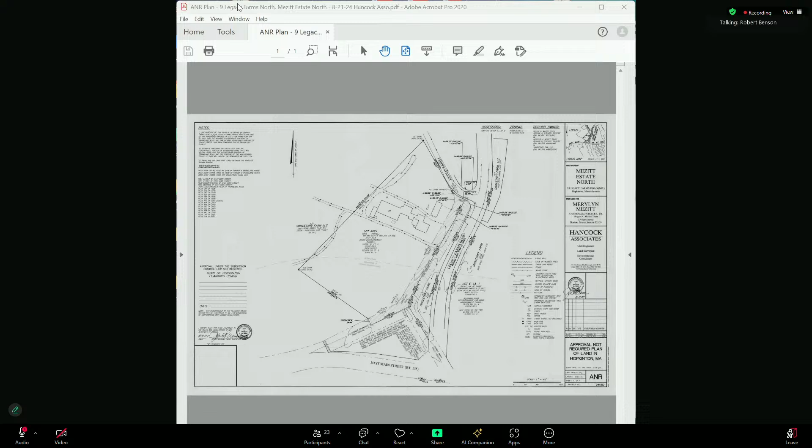So approve ANR Plan 9 Legacy Farms North, 67 East Main Street. Is the applicant on? Dan Bremser for the applicant. All right. Dan, if you'd like to give us an overview of what you're trying to do. Very good. My name is Dan Bremser. I'm a land surveyor with Hancock Associates in Marlboro. This plan is a little different compared to most that you see.

The 45-degree hatch that's closest to that original lot is the half of the road closest to that lot. What technically happens when a road is discontinued is the ownership of the road basically returns to the abutter from the center line of the road. And to make things a little more complicated, there are two record owners to that original lot, which is the Roger N. Mezitt Trust and then the Merylyn J. Mezitt Trust, which each owned 50%.

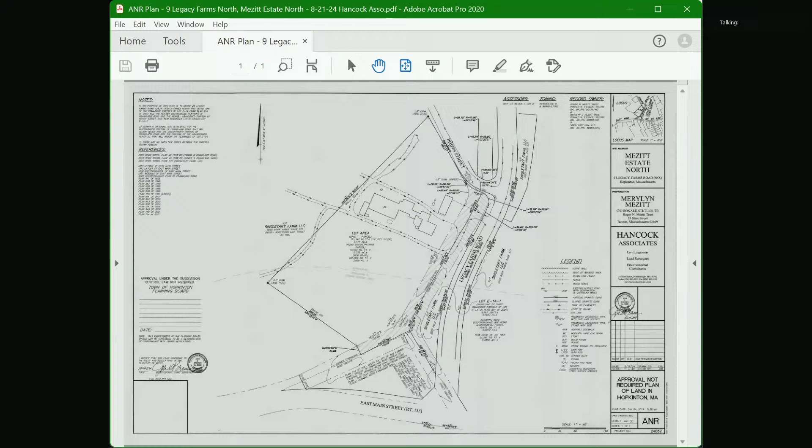So 24 Chestnut Street. Is the applicant on for 24 Chestnut Street?

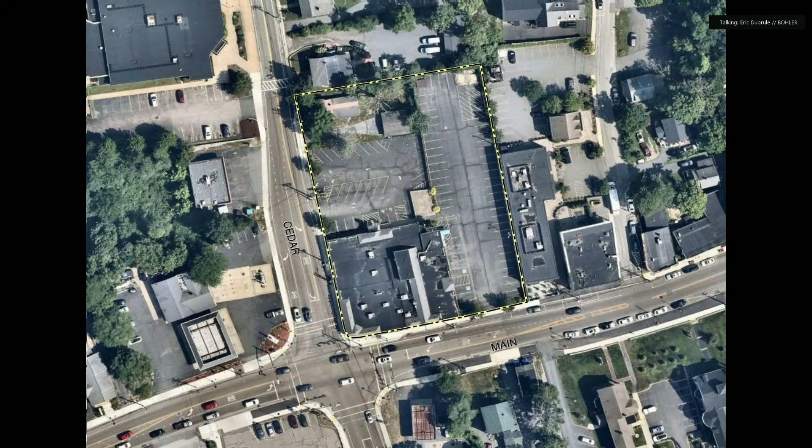The proposed project, we're essentially proposing to demolish the entirety of the site. And again, what we're proposing is a building that's a 3-story mixed-use building, comprised of about 6,800 square feet of retail and 60 residential units. Rich, if you're able to switch the slides. Perfect. So again, site access under the proposed condition, we're providing 2 driveway locations, 1 full access on Main Street, and that serves the parking for the retail as well as shared public spaces. At the very far end of that Main Street parking lot is access to the parking garage for residential parking.

We've also consolidated the driveways on Cedar Street and provide a full access driveway at the most northerly corner of the site, and that provides access to the residential parking at the lower parking garage. From a parking compliance standpoint, we're required 100 spaces where we're providing 122. And the thought process there is that that additional parking would be provided for shared public parking off of Main Street.

The existing site's very well served by existing sidewalk infrastructure from a pedestrian standpoint. So we're proposing accessible pathways not only to the front retail portions along Main Street, but also a path into the amenity spaces within the courtyard, which I think Matt will get into in a little bit more detail. Very high level on stormwater management and utilities. Under existing conditions, the existing site essentially just sheet flows either untreated into Cedar Street or is captured by a couple of catch basins and then again untreated and sent into the municipal stormwater system.

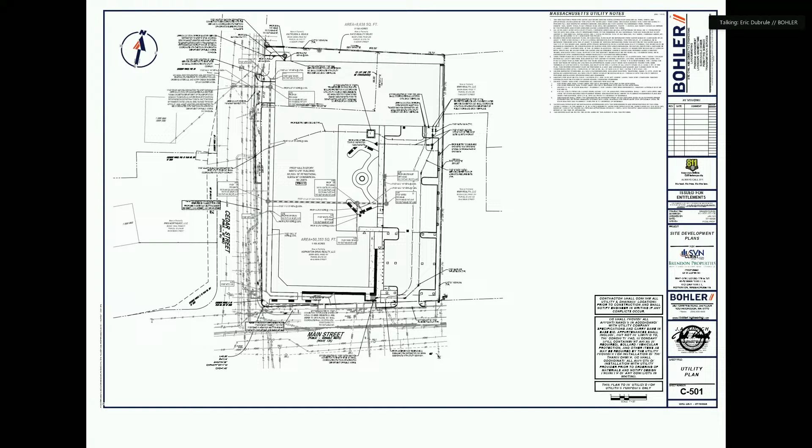Thanks, Eric. Good evening, Mr. Chairman and members of the board. For the record, Shaun Kelly with Chappell Engineering. I'd like to just give a brief overview of the traffic study that we conducted, and I'm sure we'll be going over it in more detail as the project advances.

Go up a slide. So again, as I'm sure you're aware, the project is located at the intersection of Main Street and Cedar Street, Route 135 and Route 85. They're both state numbered routes, but they're both under local jurisdiction, so there's no MassDOT involvement with the project. Our study area that we looked at for our assessment included the intersections that we felt would accommodate the majority of traffic. That's the intersection of Main Street with Cedar Street and Grove Street, the signalized intersection of West Main Street with Main Street and Wood Street, and then the 2 driveway intersections that would serve the project.

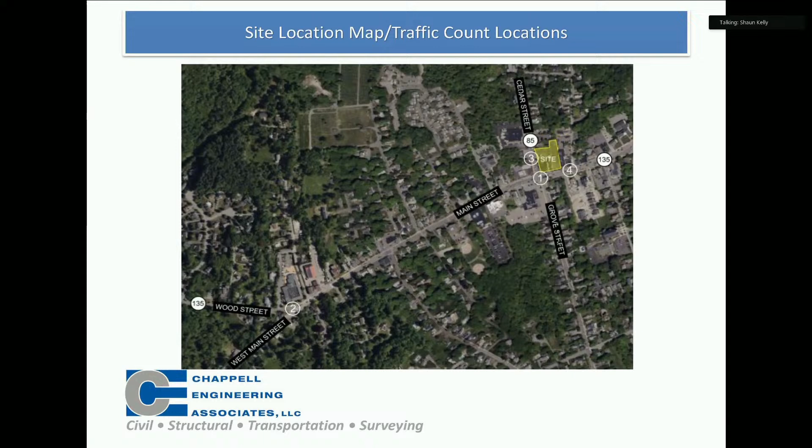We looked at traffic volumes. We looked at them on a daily basis. We looked at the weekday morning, the weekday evening, and the Saturday midday. And those are the time periods that we typically drill down on because it's the busiest time for both residential traffic as well as commercial traffic.

We looked at crash data, very low crash occurrences typically in the area, particularly at the driveways that exist today. At Main Street, we're looking at around 1 crash per year. And then on the Cedar Street driveway, it was a little bit higher, about 1.5. Looked at vehicle speeds, no issues with respect to sight lines.

With respect to the traffic itself, we rely on data that's published by what's known as the Institute of Transportation Engineers, or the ITE. And what the ITE does is it develops rates that tell us how much traffic a project will generate based on its size. And there are two components here. There's the residential component and then also the commercial component.

As you can see in the morning, evening, and Saturday, the residential component generates anywhere from about 30 to 45 vehicles per hour. That's ins and outs. The retail, pretty low generator in the morning, only 16 trips, and then about 40 on a Saturday and during the weekday evening. Now, some of those retail trips are pass-by in nature. They're already traveling along the corridor. So then that typically is 20 to 35%.

When you net all of that out, what it tells us is that this project during the busy peak hours is expected to generate about 41 new trips in the morning, about 60 in the weekday evening, then about 76 on a Saturday midday. So it's about a car a minute. Typically, it's about a car entering every other minute and a car exiting every other minute. Next slide.

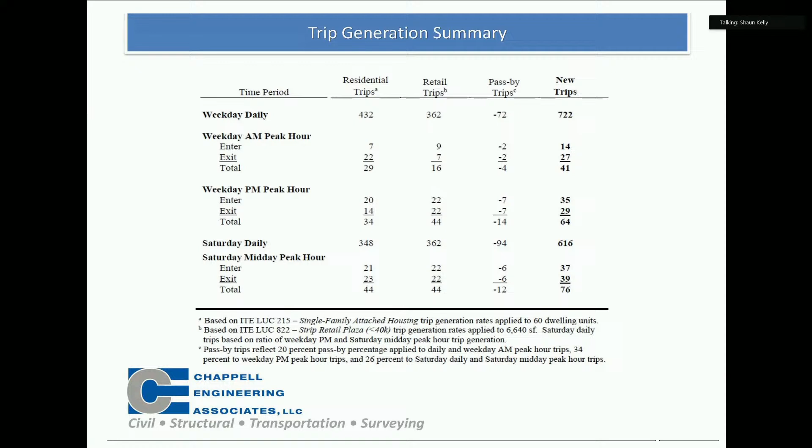I think one thing that's important to keep in mind here is that this isn't a virgin undeveloped site. It has historically housed a fairly large pharmacy. And what we did is, we ran the trip generation for the pharmacy that has been on the site historically, just to give an understanding as to how much additional traffic is expected based on what has historically occurred on site. And just not to overstate the trips, we actually applied a high 50% pass-by to the pharmacy trips. So these are half of what the ITE would say unadjusted.

And as you can see, on a weekday level, it's about 60 trips total over a 24-hour period. During the busy commuter hours, it's essentially a wash, 4 more trips in the morning, 1 more in the evening. On a Saturday, it actually does less traffic than a pharmacy would generate on a daily basis. And again, those peak hour volumes during that midday are still fairly consistent. So in comparison to what was typically out there when this project site was a pharmacy, it's not a whole lot of difference during the busy hours. Last slide.

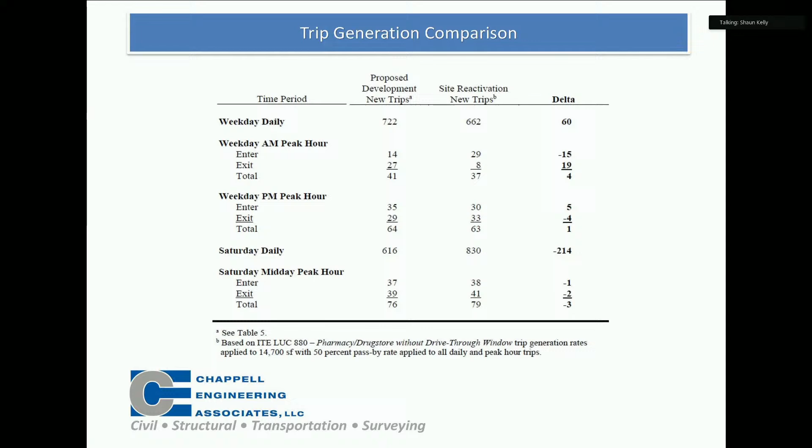So really, our recommendations are focused primarily on access. We're recommending that the 2 existing driveways on Cedar Street, the northern and southern driveways that feed into the existing parking lot, both be closed with sidewalk across them, and that the driveway would be relocated as far north as possible where the residential home is today. On Main Street, the driveway today is already as far east as possible. It's at the eastern property limit, which is where it wants to be. We're recommending it gets maintained in that location.

And then really the last recommendation is to bring the existing or proposed driveways into conformance with MUTCD design criteria, including painted center lines, stop signs, and painted stop bars, and ensuring that sight lines, again, are maintained in both directions. And that's really a high-level overview. I'll turn it over to Matt Merva now to go through some of the landscape architecture.

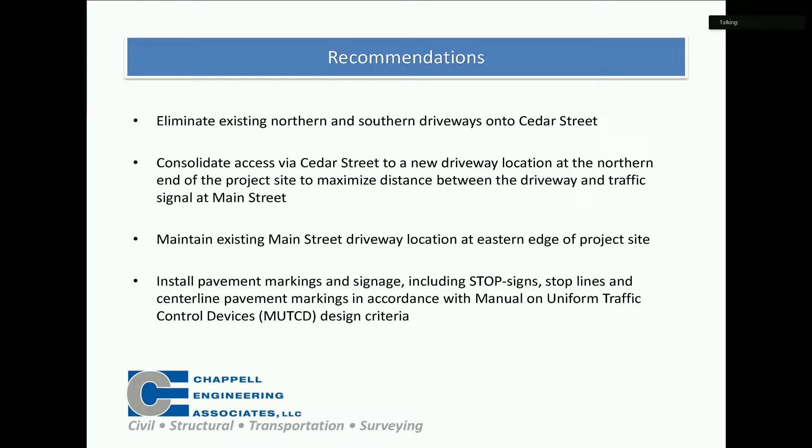Thank you, Sean. Again, Matt Mrva with Bohler Engineering, for the record, landscape architect for the project. I know we already saw this slide, but I'll just dive into a little more detail on how we're treating it from a landscape standpoint. One thing you'll notice is that our building in the proposed condition is pulled away from the corner a little bit from Main and Cedar, more than it was before.

But really trying to create some green along the back of the sidewalk here in the downtown, while still creating that urban corner that the architecture really provides for. And Rich will get more into that detail in a moment.

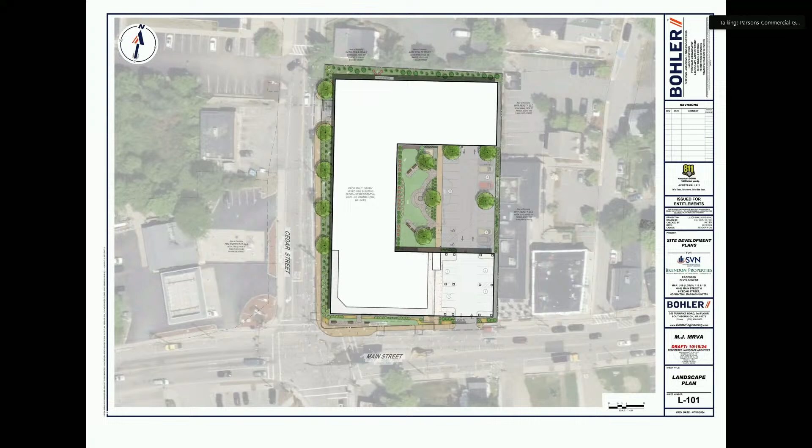Thank you, Matt. Members of the board, for the record, Richard Rankin Associates, providing the architectural service for the project. As was mentioned, our team worked hard over the last year to create a project that meets the requirements of the zoning bylaws and one that we hope will be a catalyst for future development within the town center. During that time, as has been discussed, we met with town engineering, the building inspector, Hopkinton Fire, the historical commission, and so on. And we've worked to pay homage to the architectural vernacular of this historic town of Hopkinton in an effort to create a mixed-use building that fits into this prominent corner within the town center. We'll get into a little bit more of some of that homage, if you will, in upcoming slides.

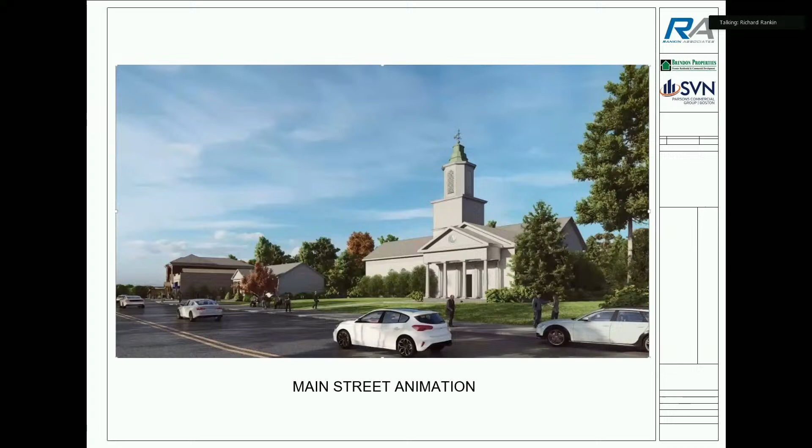We started to create an animation that traverses westward on Main Street, beginning at the town common and ending at the intersection of Main and Cedar Streets. This was done to show the context of the existing streetscape and relative proportions of the buildings within it. We start with a view of the Presbyterian Church. And let me just get this running for you.

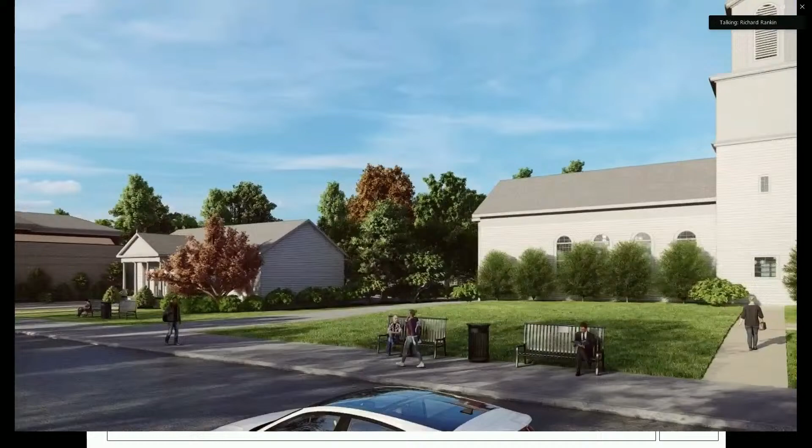Hopefully it's fairly smooth. We've had some issues with Zoom, but start off at the Presbyterian Church, past Masonic Lodge, Middlesex Bank, Bill's, the Town Hall, past some restaurant storefronts, barbershop, a two-story mixed-use building, and the Central Public House next door, and then our building that makes its way to the corner and around down Cedar Street.

As you can see, the height of the building, with our facade and cornice, is similar to that of the adjacent mixed-use building up the street. This is due to some assistance from the declining grade down Main Street, but hopefully it gives a flavor of what life is like without the drugstore and what it could look like. And the scale of the building relative to the existing buildings on the north side of Main Street.

We think it fits very well, and especially with the first floor retail component, which engages and activates the streetscape along with the transparency at the arched entranceway that allows interesting views into the courtyard area and breaks up the massing of that facade. Additionally, as has been discussed, we've got that wider setback at the street curb line, which was installed as part of the realignment work at the corner there, and it's been landscaped effectively.

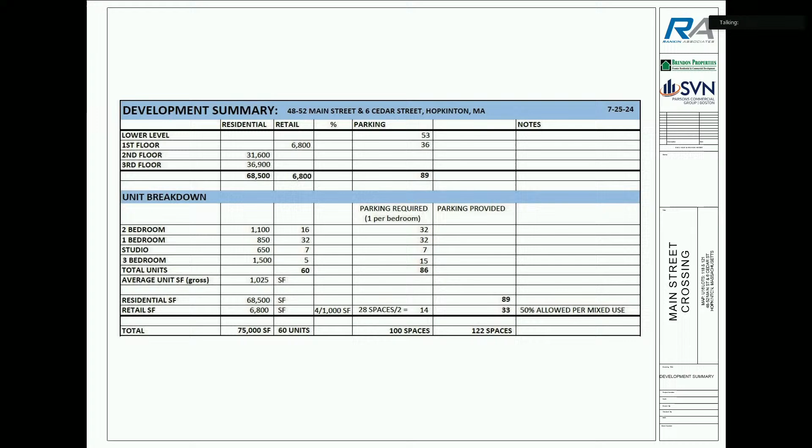Starting with the lower level, we have a controlled access off of Cedar Street, accessing 53 assigned residential spaces, including accessible spaces. We do have 2 circulation corridors which provide vertical connectivity to the upper floors. There's amenities, including bike storage for tenant use and maintenance and mechanical spaces for building operations. Additionally, we have areas allocated for the storage and removal of trash.

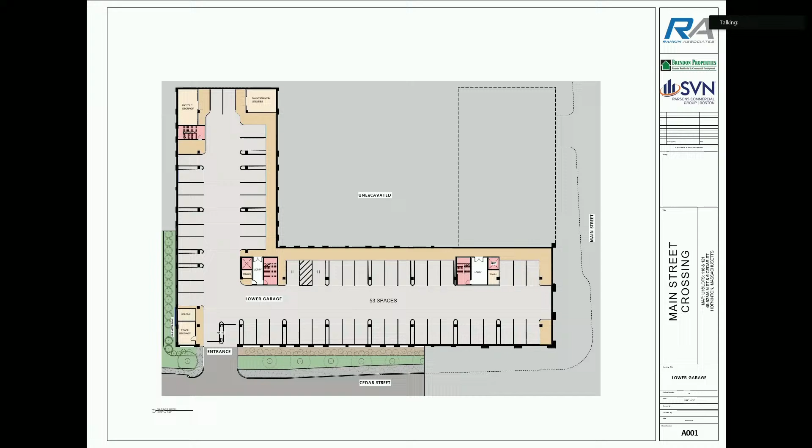On the first floor, we have retail spaces shown here in purple, violet. Our courtyard, the 33 spaces of public parking, including accessible spaces. This level also contains 36 residential parking spaces under cover. The plan indicates in yellow the covered walkways that allow public access to the retail space and also the main elevator core. Visible on this plan, as it has been discussed, is that generous landscape buffer with public space amenities between the existing curb and on both Main and Cedar Streets.

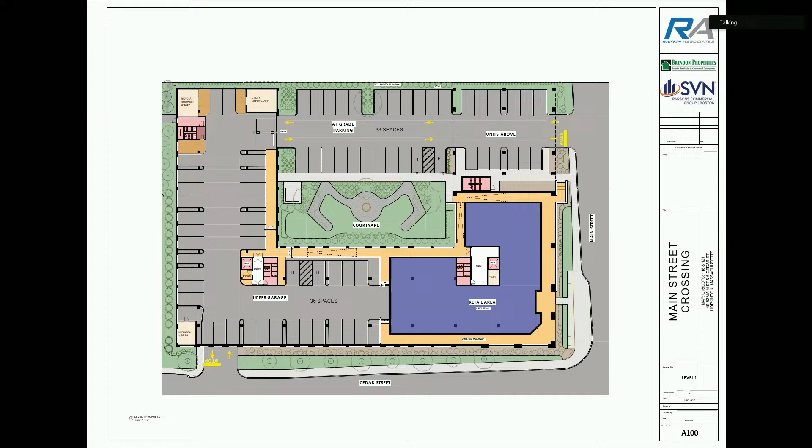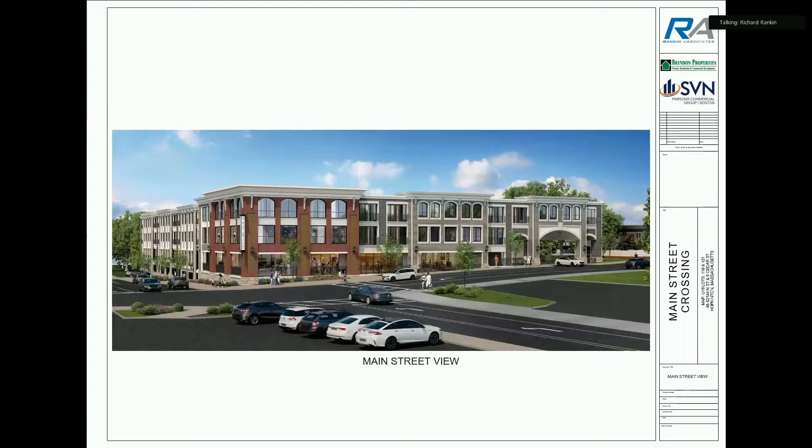The second floor contains 28 residential units of varying configurations and the circulation corridors and egress stairways. The third floor contains 32 units, similar to the second floor.

The Main Street view shows the efforts that we made to adjust the massing of the building to create the sense that the building was perhaps built over time, and that by breaking down the facade into smaller, distinct elements, we reduce the overall perception of size. The building's focal point at the corner with distinctive elements of brick and pronounced cornice and pilasters serve to anchor the project. We've got recurring facade elements with arched windows, pilasters, accentuated cornices, and brackets that serve to add rhythm to the length of the facades.

And then in between, we have recessed infill portions with larger windows and Juliet-style balconies set back in an effort to reduce the building massing and create a more fitting scale. We've carried similar treatments along the Cedar Street elevation, which falls away dramatically as one proceeds north on Cedar Street. We have 2 levels of parking, 2 levels of apartment units over retail and a parking level and a lower level of residential parking.

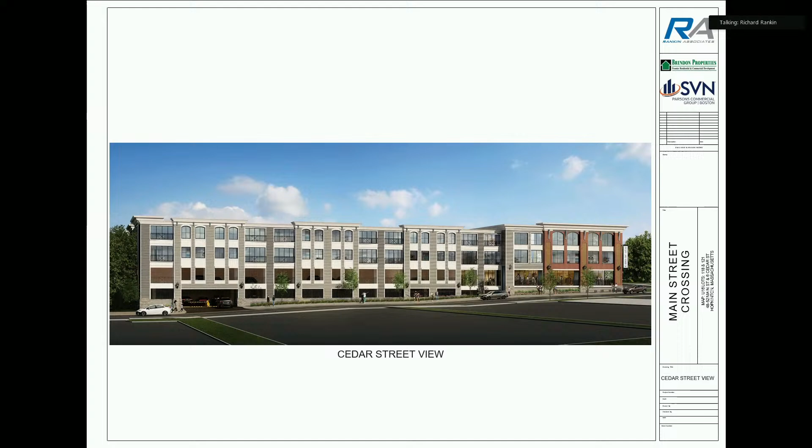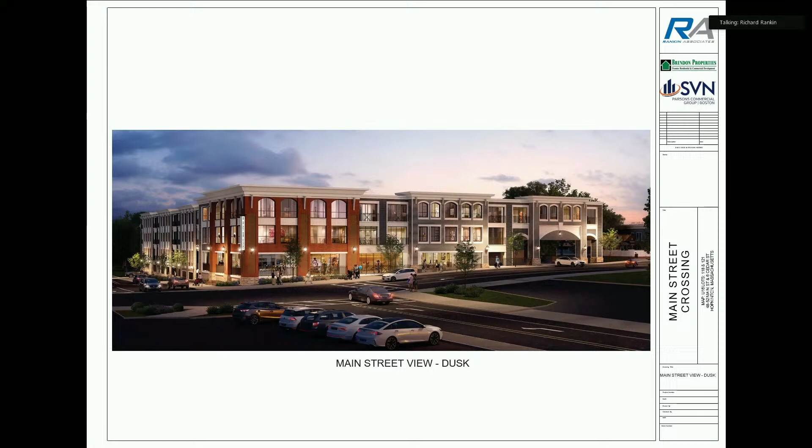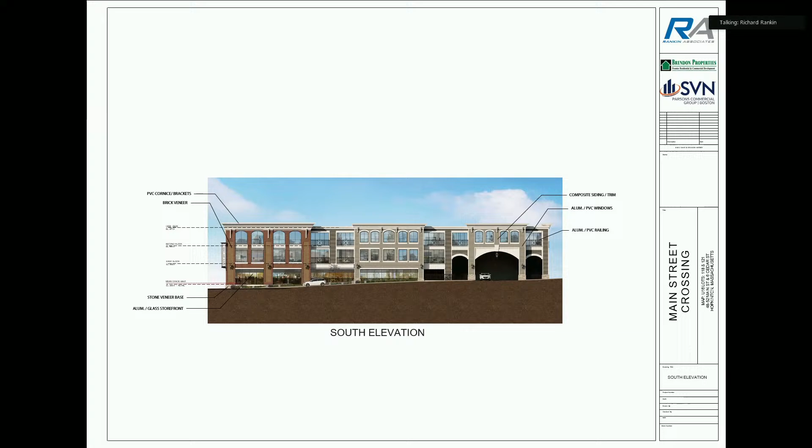The evening view shows activation of the street with a focus on merchandising opportunities at the retail level along both Main and Cedar Streets with period accent lighting. This shows our proposed exterior materials consisting of a rusticated masonry base, storefront, brick veneer, composite siding and trim, and accentuated cornices and bracketry. These materials are similar on the Cedar Street elevation.

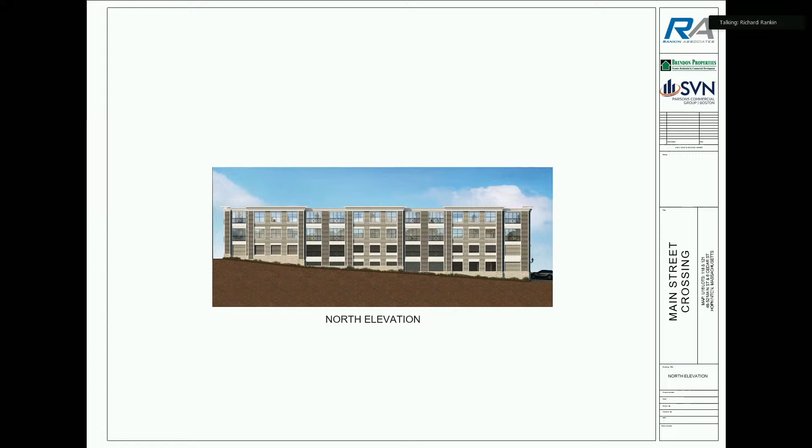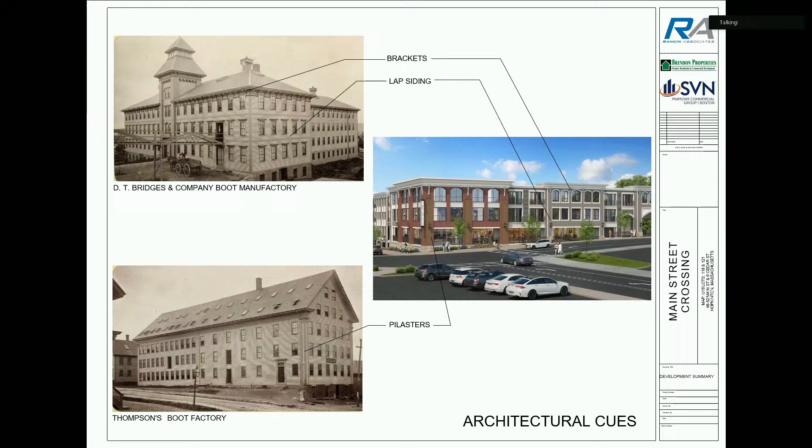First, we took cues from 2 factory buildings that were once a driving force to the economy of the town. One, the DT Bridges and Company boot manufactory, the other, the Thompson boot factory. They were large buildings within the town with elements that included rusticated stone bases and detailed pilasters and bracketry and the use of lap siding. Another building we took inspiration from is the town hall with its masonry pilasters, arched windows, and detailed cornice treatment.

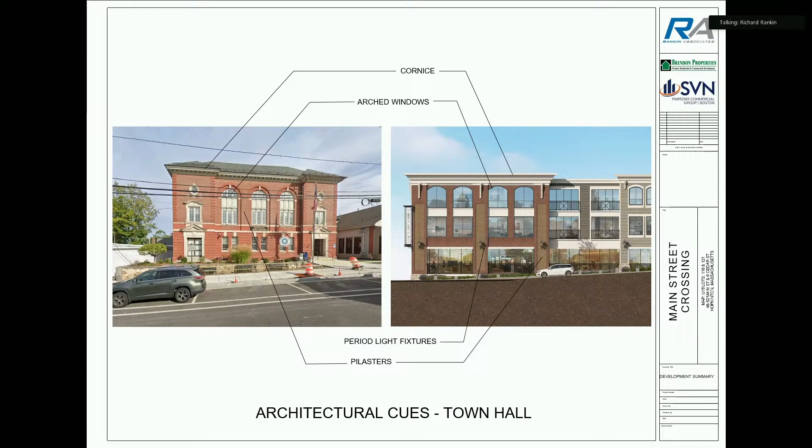Additionally, we intend to use period architectural lighting fixtures on the Main and Cedar facades to accentuate the architectural features of the building. And lastly, we looked toward some iconic architecture of the former high school at 85 Main to draw cues from the use of brick and again, the arched windows and stone base materials, all of which we hope addresses some of the historical commission's concerns and the desire for historical precedents.

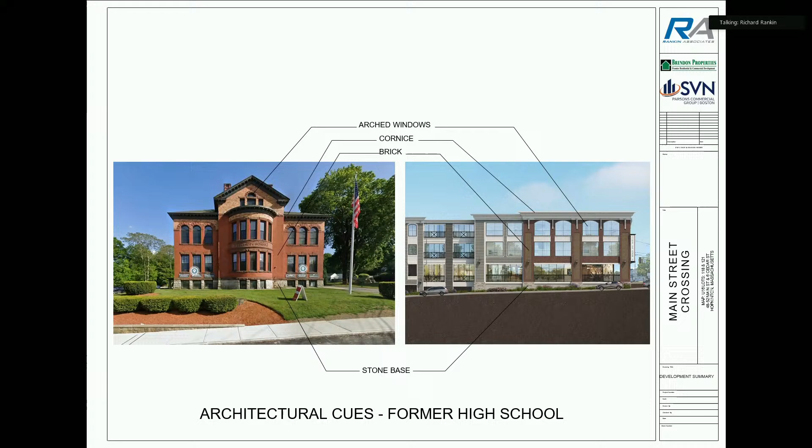With that, it really concludes our presentation. At this point, we'd be glad to answer any questions that you might have. The development team together looks forward to moving the project forward through design review and addressing any comments along the way. And we thank you again for letting us present.

Thanks, Richard. So I think what I'd like to do now is, John, if you could give a staff report and a next step.

Sure, thank you. So I'm going to start off by saying this corner of downtown is going to be a really important corner. You have anchors in downtown. When you have an intersection that's your downtown, the corners are your anchors. Right now we've got two gas stations, a vacant pharmacy, and an existing pharmacy. So this is going to dictate, and I'm not saying this development necessarily or the design or anything like that, but what goes in this place is going to dictate what Hopkinton's downtown looks and feels like into the future.

So I want the board to really, and I know I don't have to tell you this, but I feel like I have to, otherwise it's going to sit in my head. I want the board to really think about it, consider that, and just really put it in that context of, this could really set in motion what Hopkinton's downtown is for the next 15, 20, 30 years and beyond that.